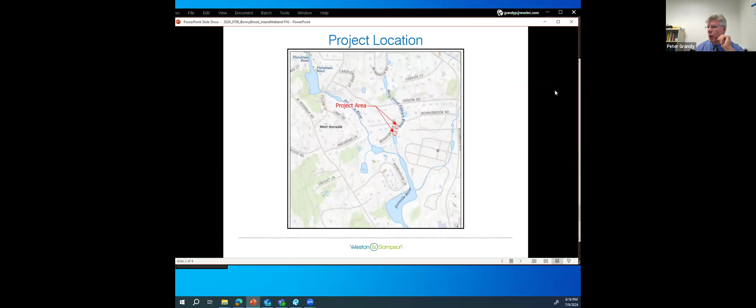So just to give you a project location, they're right on Bonny Brook itself. They're very close to each other, almost adjacent. You go around the bend and the other structure is right there. So this gives you a better close-up of the two bridges. 102025 is closer to the pond area, and 102029 just has the brook flowing through it. So this just gives you an indication.

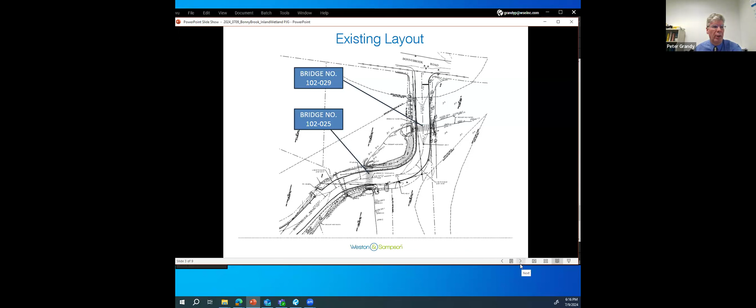These are the structures, the pipe structures with some head walls that we're in the process of updating and repairing. The actual pipe structures, you'll notice that there's some issues with debris in front of some of the pipe structures. The pipes themselves, there are some scour holes in front of the bridge structures as well on both sides, the inlet and the outlets. So we are doing a little bit of work in stream as well. The majority of the work for the bridge structure is filling in mortar, repairing some of the mortar and the stones. We're not replacing the bridge structures.

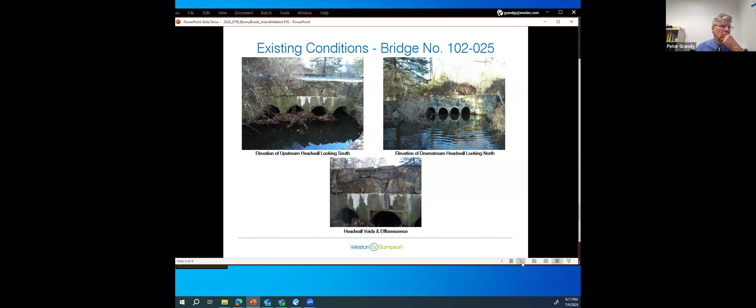Hydraulically, they are sufficient as the openings that are there for the design required for this type of roadway. As you could tell, there's some deficiencies where stone is missing, grout is missing, that type of thing. But the other issue, like I said, is that there are some issues with scour holes at the beginning and end of the inlet and outlets of the bridges. And there is some debris that we would like to also remove as part of that work.

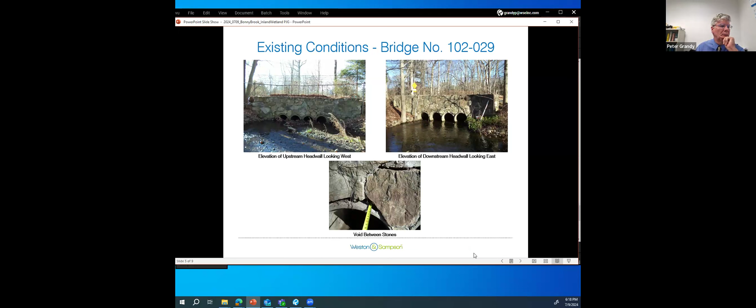So this is 025. This shows you approximately, or gives you the temporary requirements and the water course requirements and permanent changes that we're making. A lot of this is riprap that we're putting in, and then we are putting in a cofferdam. We'll get to that a little bit later. The cofferdams are actually going to allow us to work on one side or the other of the bridge structure, keeping it in the dry and not doing any work in the waterway while it's wet.

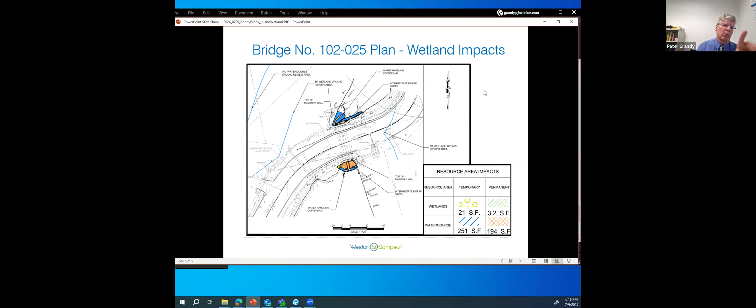This is the other bridge structure. Again, a little bit more detail. It's a pretty big scour hole along the east side of the structure at the inlet, but at the outlet, not too bad. But again, there's some scouring going on in front of the structure. It's not necessarily too deep. This one is probably the deepest out of all the locations, so it gives you a feel for how deep it's getting. It's not horrible, but we want to protect the bridge structure to allow it to work in its best capacity.

This is a cofferdam that they would use, showing you the temporary cofferdam and how we're going to handle it. The cofferdams will break this up into about half, the structure will be done at any one time. Again, the cofferdams will be put in the waterway at a low flow. We understand, we believe there are fishways here too. When we do the intermediate riprap in the stream, we will also dress them with natural stream bed material.

So any fish and stuff like that, you don't have to worry about that. We did minimize the size of the riprap as small as we can go based on the flows that are out there and what would be anticipated during storm events. The purpose of most of this is repointing, just doing some repair. Up on the roadway, we are replacing some of the guardrail, but that won't affect the streamway in any way, shape, or form.

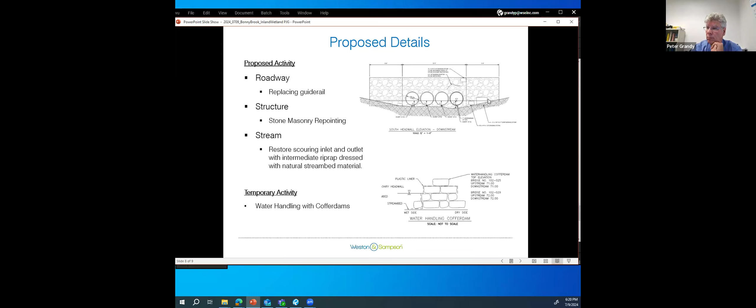So based on that, I thank you. And if you have any questions or discussions, I'm here to answer them.

Could you maybe go back to the diagram that you had of the wetland impacts and the extent? So just to be clear, there are some temporary impacts to both the wetland and water course for each of the bridges. Correct.

Then the permanent impacts within the water course, for the most part, that is where the deposition of riprap would occur. Yes, there is a little bit on the stream bank, but we're putting in riprap only because of erosion on the outlets. There's a little bit of erosion occurring. So again, it's just to protect the streamway and not have an issue down the road with the structure itself. Thanks for clarifying.

Sorry, how old is the original bridge now? The bridge itself, I believe, is like 30, 40 years old.

We did look, when we went down there, we actually looked in the culverts. The culverts were in great condition. There was nothing in them, they were very smooth. You can actually see from one end to the other. So there's no bulges or anything happening because of the roadway above it. The head walls, some stones were missing, so we want to repair that and put a little bit of mortar in to get them solid so there's no issues down the road.

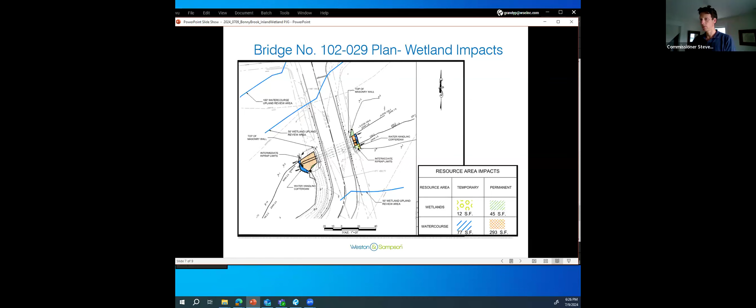Okay, moving on to discussion and or decision. First one is S24-640, Lloyd Road.

The property owner was here but I think he's now left. The applicant's agent, Jay Fain, was unable to attend tonight, so he's asked that the matter be tabled to the next meeting. Happy to do that. I think that is fine, since listening to the recording of the previous meeting, there are some requests of the applicant to provide additional information before you schedule a public hearing, and we haven't received any new information yet.

Noted. Moving forward then to S24-641, 4 Singing Woods Road. This application you received at your last meeting. Again, there are two components: the one most proximal to the wetland is the proposed wetland mitigation and restoration stemming from an unresolved 2004 wetland violation. Additionally, the applicant proposes to develop the southernmost portion of the lot, and portions of that development activity are within your upland review areas.

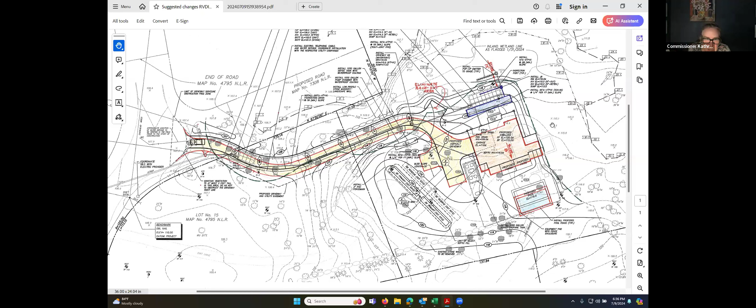Just trying to get an understanding of how many trees are being removed from the upland review area for the driveway. Are those the circles there that are lined out? Let me enlarge this a little bit more.

Okay, so as we shifted, there's a nice oak over here we can protect. These crosshatched ones here are the ones slated for removal. And even this one here, even though we're moving it, placing these infiltrators in helps to hydrate and recharge, but we would have to lose a tree, these few in this area here.

And then we're keeping all these. The nice part is, instead of bringing it into here, this is a huge buffer, and this gets totally protected now. But yes, looks like there's - if I count these, 1, 2, 3, 4, 5, 6, 7, 8, 9, 10, 11, 12, 13, 14, 15, 16, maybe.

Of a decent size. Is there any appetite to maybe install new trees to help offset the removal of some of those? I'm gonna just say one thing before I defer to our Bill Kenney, our landscape architect.

I've worked with Mr. Efron on a number of projects, and if I have anything to say about him that may not be a compliment, it's that he tends to over-landscape. So any suggestions Mr. Kenney proposes here, I think he will absolutely embrace.

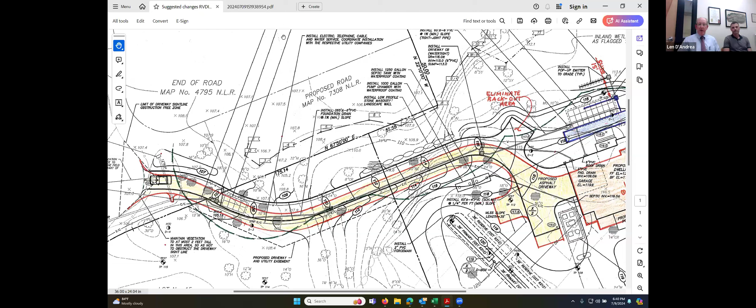Early next week to have them submitted in time for the public hearing. Alexis? So let me just double check what we have written in our regulations. Hold on a second. Thank you.

So we do have, under section 60A-8, application procedures, paragraph I: if a public hearing is to be held on an application, the applicant must submit all documentary evidence in support of the application to the agency no fewer than 10 days prior to the date of the hearing or any reconvening thereof.

So I think if you can get it in within 10 days prior - by the 13th, that would be less than a week. That would be this Friday. I'm making Brian say yes, he can meet that deadline.

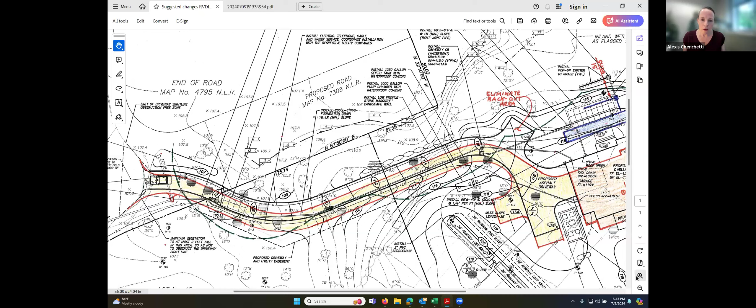So it's all one application. As I noted, there had been a violation notice issued in 2004 to the previous owner for filling the wetland. That was unresolved. As I review aerial photos, it's clear that the filling continued over time.

When the current owner approached the office to talk about development of the lots that were recently purchased, there was discussion with me as far as how to rectify the violation and then the timing of development. The applicant could have come in to just rectify the violation and then return with an application for the new house construction.

If they had done that, the new house construction would potentially not have even triggered a significant regulated activity, based on the amount of activity involved with the house. It was my suggestion that they come in together, since there would be questions about what they're proposing for the lot in the future. Knowing that any new owner seeking to fix a violation on a vacant lot, I didn't want the agency or the public to think a new owner was coming in to rectify the violation without talking about their future plans. So they are being proposed as one application.

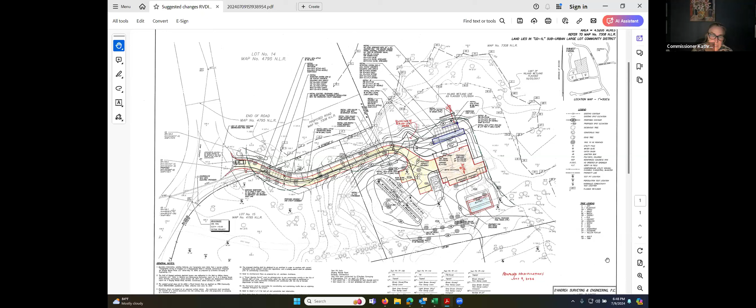Right, Mr. D'Andrea can chime in, but I believe it was a 1956 subdivision. So this lot was a pre-existing lot, if I recall, and the other lots were part of a 1956 subdivision. Let's see how best I can explain this. The lots that Mr. Efron bought included lots 1, 2, 3, 4 on map number 4795, which was a subdivision. It also included this 5th lot that you see on the screen right before you, approved by the City Planning Commission of the City of Norwalk on March 7th, 1956.

And what that did, it kind of left that road, the paper road I was explaining, in limbo. It showed it, but it didn't show the end of it. And I think that's why, subsequent to that, on March 23rd, 1970, they filed map 7308, again on the land records, prepared in 1968, and it basically confirmed the size of the property and confirmed the end of this proposed road, which is what you see in front of you tonight. So there were no, and then of course before Mr. Efron bought it, there was an extensive title search done, and there were no restrictions or deed restrictions that would preclude us from going forward.

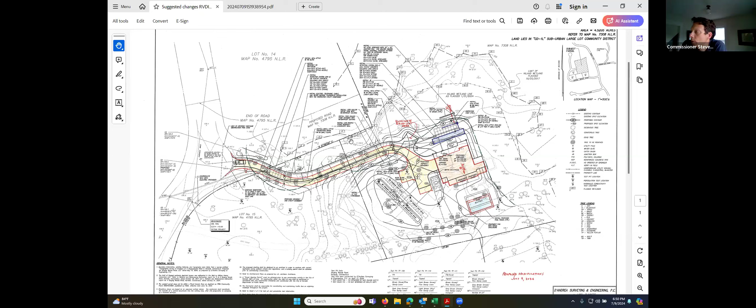Alexis, would you share the wetland restoration drawing? Let me stop sharing here. Or I can if you want. Sure, I can, or if you want Mr. Kenney to walk through it. Unfortunately, I will share. Never mind. Okay, it's good, thank you very much. I appreciate that. I could talk about it, but I can't share. Let's see. Oops, pending.

I think the question we're trying to resolve is what is better? Alexis, it sounds like your suggestion of the original plan to remove the fill is better. I would argue absolutely, yes. So this is...

When the applicant initially approached my office, this was the wetland delineation line, based on today's conditions. I let them know there had been wetland filling and requested they go back out to the site, which they did. Their soil scientists returned with a small machine to do test holes through this area, and they determined that the wetland line more likely approaches this line here.

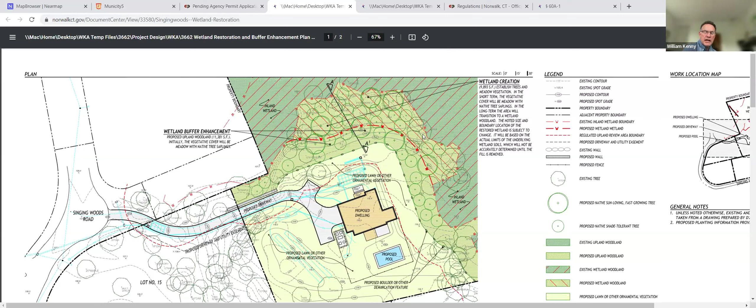So Bill, you're welcome to describe what happened. Yeah, I agree with that—that's accurate to what we did to map the limit of the wetlands today and approximately what the limit of the wetlands were before the fill was placed. We feel we're pretty close, using a machine to do deep hole test pits. It allows us to dig down, find the buried topsoil, look at the subsoil, and back our way out until we hit an upland soil, then make a determination of where that historic wetland boundary line was. So that's what you see before you.

The difference is close to about 10,000 square feet. With that fill, you eliminate pretty much all the functions you have in that wetland area. There's still habitat, obviously, because there's a vegetated surface and soil, but you're not getting things like flood and stormwater storage in the wetland. You're not getting groundwater discharge or water treatment, and you're not getting habitat for the most obligate wetland species. You might have some transitional species that grow in both wetland and upland, but you've eliminated things like skunk cabbage and other species you pretty much only find in the wetland.

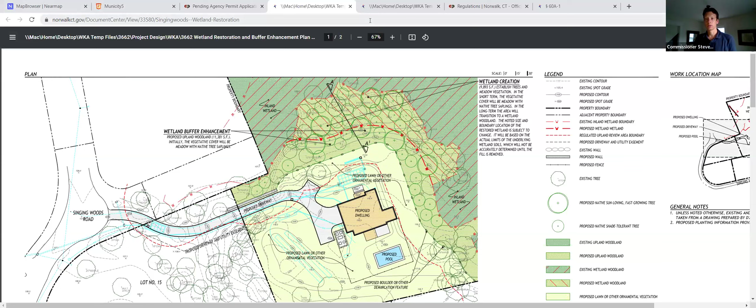Okay, as long as we resolved it, I think that was the outstanding item, right? I didn't know if we were making any changes to what the plan was, so good. All right. Okay, thank you for mentioning that, Heather and Catherine. All right, so we'll move on then.